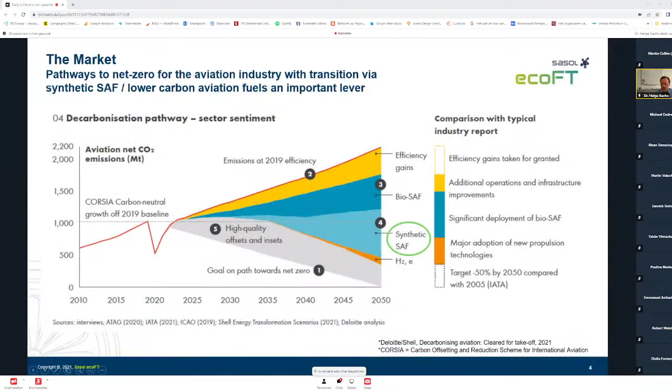So having said that, that was actually the market opportunity or the potential to decarbonize. The industry has consumed, the aviation sector, around 300 million tons of jet fuel prior to COVID in 2019, and the market forecast is that there will be volumes of 400 to 500 million tons of jet fuel consumed in 2050, according to all the market forecasts of the major OEMs.

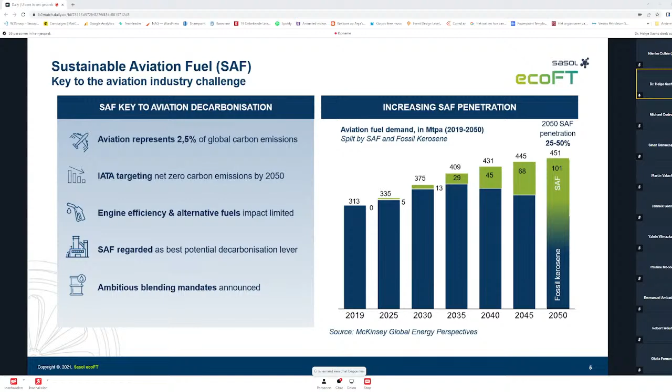There are different approaches in the EU, gearing up to produce more SAF with blending mandates or tax incentive schemes. So in the EU there's rather a stick approach, where you have to pay carbon taxes and are sanctioned as an airline if you don't comply with blending mandates, whereas in the United States there's rather a carrot approach, incentivizing industry with tax harbors to produce sustainable aviation fuels.

The European Union has extensive blending mandates already in place, up to two-thirds with RefuelEU. We also anticipate the EU will react to the recently announced IRA, the Inflation Reduction Act, which allows, for example, $180 per ton of CO2 captured via direct air capture, or up to $1.75 per gallon of e-fuels and clean fuels.

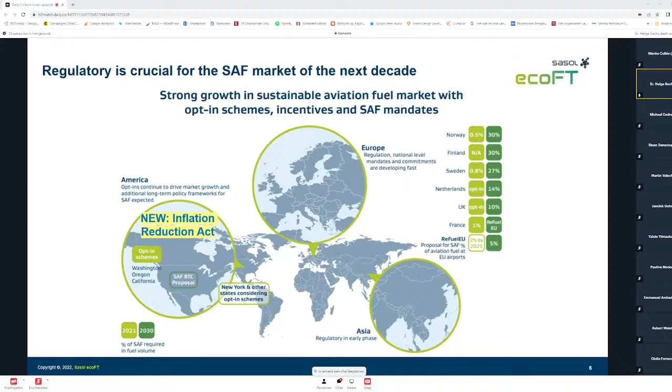Having said that, there's scarcity of green fuels, of clean fuels. The so-called HEFA pathway is the one that, if you're trying to source SAF as an airline today, you would rather use, as it's the only one industrially available at larger volumes already, with increasing volumes, since producers have prepared themselves to produce SAF via HEFA. The only obstacle the industry foresees is that HEFA feedstocks are rather limited. Forecasts say up to 20 million tons of SAF could be produced by 2050 using the HEFA pathway, with different feedstocks leveraged.

Soy and even other feedstocks could be used, with palm oil versus food being a concern. That's why it's really important that these fuels ideally leverage feedstocks that are truly sustainable, producing via other pathways in the United States from solid waste, MSW, which is an important one.

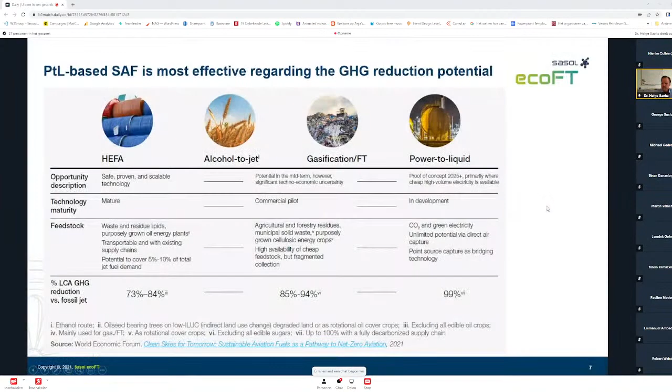Having said that, the Fischer-Tropsch technology is very much now coming into play. It's well positioned to help produce SAF because it's agnostic to both the hydrogen and carbon source. As mentioned before, Sasol, for example, can use it agnostically, either using coal, gas, or industrial CO2.

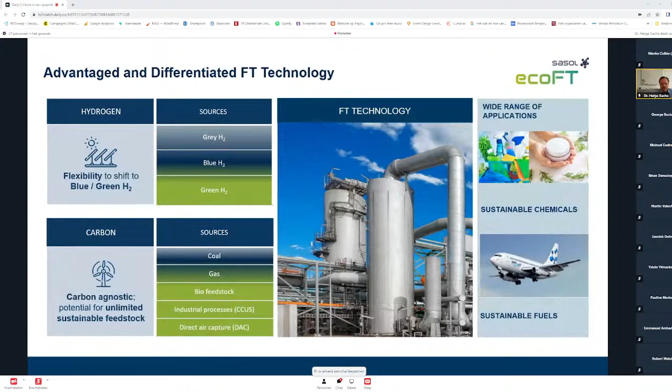The ultimate pathway would then really be direct air capture. So in a nutshell, the different pathways using Fischer-Tropsch can be seen here: either using biomass from forestry or agricultural residues or municipal solid waste can be leveraged.

These are then gasified in a gasifier to produce the carbon monoxide molecule, or we can use direct air capture. Companies like Carbon Engineering or 1PointFive and Oxy in the United States are gearing up to successfully build the first large industrial scale plant in Texas, which will capture and sequester around 1 million tons of CO2 per year, which is certainly an important lever.

However, with direct air capture in current scenarios, at large scale there's potential to build around 173 plants in the best case scenario by 2050, because each plant has a capex requirement of around $1 billion. That's a major capex impediment to bringing direct air capture to scale, because the carbon molecule in the ambient air only has around 400 parts per million. So 400 ppm is certainly the major impediment to using direct air capture at scale.

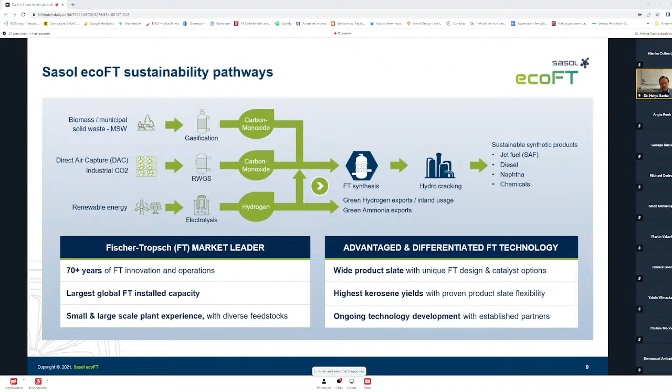And then there's the additional capacities in these countries. Just like, for example, I was in Montreal two weeks ago — the province of Quebec already has 40 gigawatts of renewable electricity as installed base capacity. So that's also a very important lever, leveraging that renewable electricity.

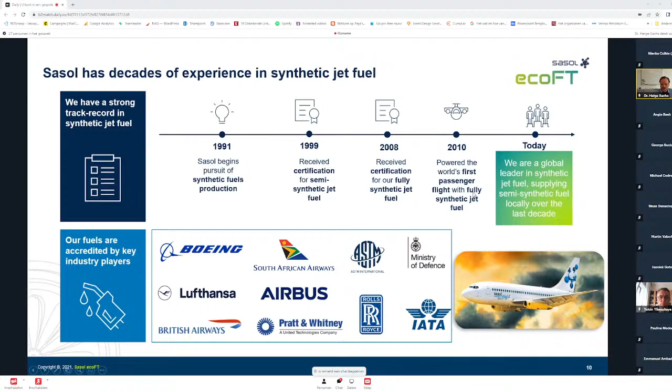Looking at Sasol, we have a long-standing, more than 30-year history in producing synthetic fuels from either coal or gas as feedstocks, and we achieved that over the years with multiple... a blend of synthetic paraffinic kerosene. This can also be used, because it's aromatics-free, as a proxy fuel for PTL sustainable aviation fuel. So we have this long-standing history in South Africa with Sasol.

If it comes to the question, when will this be real? Refer to one of the plants we are currently commissioning. Here, for example, in Uzbekistan, I had the chance to visit that plant four weeks ago. It's based in the south of Uzbekistan near Karshi. Very impressive, because it's a model plant that exists at that scale, and the layout of the plant is certainly unique in the whole world. That's a GTL plant, a gas-to-liquids plant.

There are a couple of projects that we're currently launching in the European Union. One of them is using biomass as feedstock, together with a partner, the company Uniper. Another project is in Germany, using a cement plant with the international cement producer Cemex. Another project we've announced is in the city of Hamburg, together with Siemens Energy, Uniper, and Airbus. Airbus is also apparently using the SAF for delivery flights, for ferry flights. So that's also a quite interesting landmark project and asset.

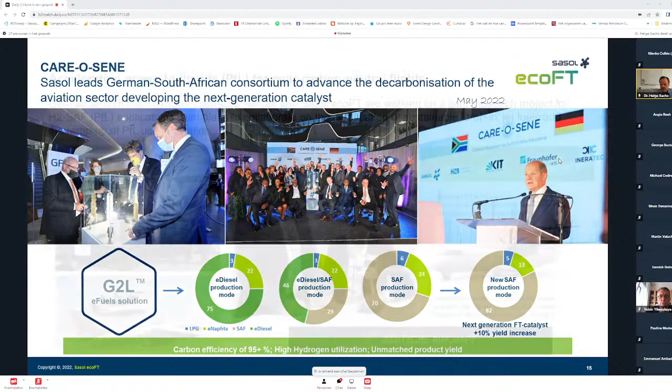What is really important is to use a catalyst that enables us to increase the yield of sustainable aviation fuels to up to 82%, which will be the industry benchmark with our latest next-generation catalyst development, because it's apparently a green premium product. The German Chancellor most recently started a project with us at our headquarters in Sasolburg, near Johannesburg, and we are currently developing a consortium of multiple research institutes like Fraunhofer, KIT, and Helmholtz for the development of this next-generation catalyst. We're also working together with OEMs like Deutsche Aircraft, but also Boeing and Airbus, to certify this PTL sustainable aviation fuel. That's a journey where we are currently leveraging, as a proxy fuel, the GTL-derived Fischer-Tropsch synthetic paraffinic kerosene. So that's Sasol in a nutshell, and I'm happy to answer your questions.

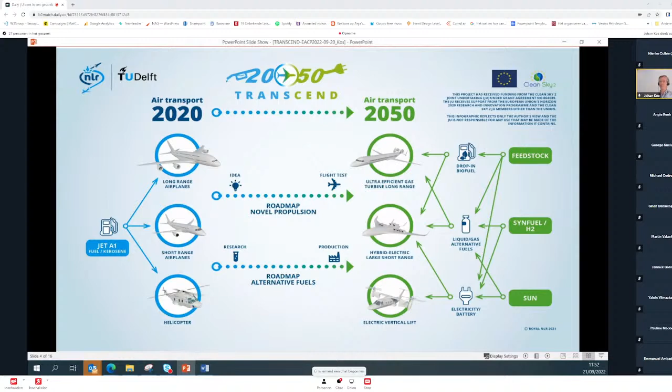I don't have to explain much on this slide, because it was already nicely, very well, and in much more detail introduced in the previous presentation. But to say that here in Transcend, we focused on sustainable aviation fuels, both the bio and waste-based one, and the synthetic one. We also considered hydrogen as a fuel, and I think it's useful to note that when we're talking about hydrogen, we're referring to green hydrogen, but this is also a feedstock to produce synthetic SAF.

Then in terms of emissions, we will talk about gross emissions and net emissions. Gross emissions are the emissions that come from the tailpipe of the aircraft. Net emissions take into account that the carbon used was coming from sustainable biomass, recycled carbon, or carbon coming from air.

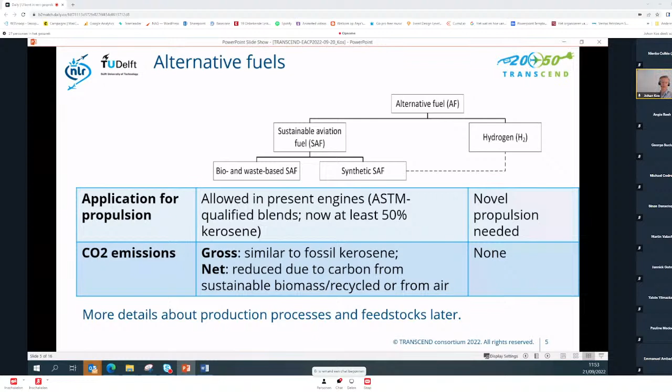In terms of technology, we'll focus a bit more on propulsion technology and aircraft technology. Clearly with sustainable aviation fuels, they can already be used in blends. But for hydrogen, it's not possible to do that with present propulsion, and really novel propulsion is absolutely needed. There are also very good reasons to have propulsion improvements even in combination with SAF.

So we looked at a number of propulsion concepts, went into detailed literature study to see the opportunities there. This is just a very short summary of the 7 propulsion concepts that we went into in much more detail. We can look at the usual combustion type of engines based on gas turbines in combination with SAF. We look at hydrogen-based combustion, and other hydrogen variants, namely in combination with electric fuel cells, or hybrid hydrogen. Those are the ones we will focus on. There are, of course, a few other alternatives mentioned here, but we will not go into that detail.

In terms of application with hydrogen and electric flight, it's typically for somewhat smaller aircraft, but you can even go up to twin aisle configurations for short distances.

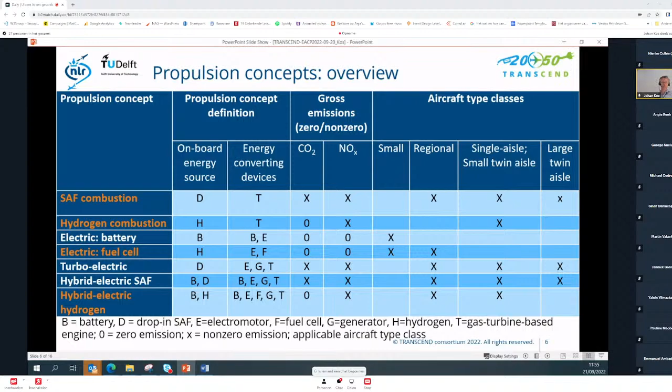So then we started, we wanted to evaluate the impact on the fleet level on the transport fleet. So we start with this propulsion technology and evaluate what their gross emissions are at the aircraft level.

So we did that in 2 ways. One is we take aircraft concepts with novel propulsion as being modeled and investigated by the Clean Sky, European Clean Sky 2 program. In this program, it's all about propulsion based on fossil kerosene. Here we will look at the use of sustainable aviation fuels, but of course it does not change very much in the gross emissions.

And the advantage of the Clean Sky 2 aircraft is that they are much more energy efficient than present aircraft, and so that is an advantage in terms of reducing the impact on the environment.

Then as a second type of aircraft, we looked at hydrogen-powered aircraft. We took a number of these Clean Sky 2 aircraft concepts and rebuilt them into hydrogen-powered aircraft. We modeled that type of aircraft and checked the modeling and assumptions with a group of experts from industrial partners, academics, and research organizations, and we evaluated that with our MASS tool, which is used for evaluation of powertrains in the context of an aircraft.

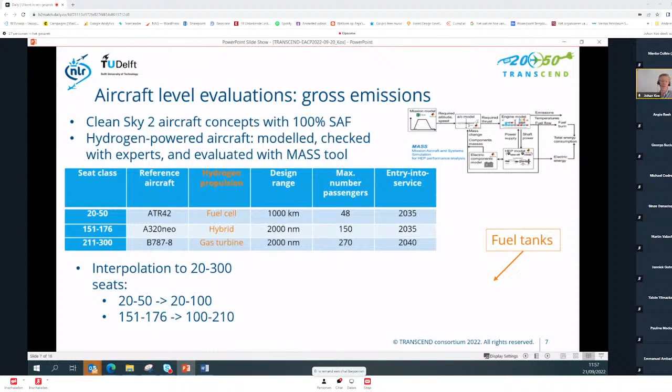This has been done for 3 types of aircraft representing the seat classes you can see there: an ATR-42, an A320neo, and a Boeing 787-8, with different types of hydrogen propulsion technology - fuel cell for the smallest, pure hydrogen combustion for the largest, and a hybrid configuration combining the fuel cell and the gas turbine for the middle one.

And then we do that for shorter design ranges than usual, with the normal number of passengers, and with entry into service in 2035 for the first 2 and 2040 for the last one.

Here you see an example of an artist impression of the SMR, the variant for the 151 to 176 seat class. What you can see is the fuel tanks are modeled to be in the back, and as a consequence the center of gravity shifts backwards, which has been modeled by moving the wings further back. Of course, it also has to be taken into account to what extent these wings have to be changed.

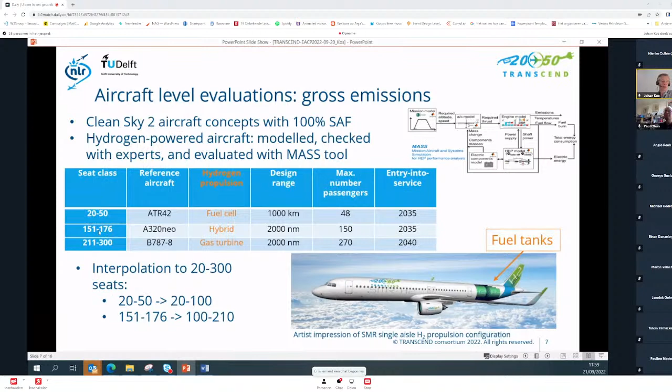So we applied these results to the whole seat classes from 20 to 300 seats by using some interpolation.

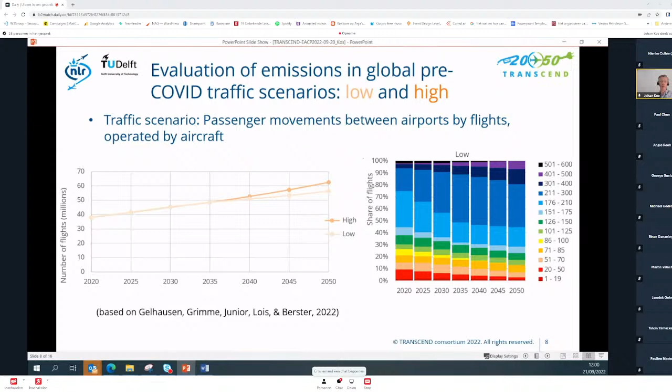Then on the fleet level, what we see is comparing two scenarios. One is with the Clean Sky 2 aircraft, so with technology improvements and SAF at 100%, no blending, or introducing in this scenario also a hydrogen aircraft for the 20 to 300 seats with short ranges. And we see globally, if we introduce that, a gross emissions reduction in 2050 which is 20% more due to the use of hydrogen aircraft.

And with only a slight increase of gross energy consumption, and of course, introducing hydrogen aircraft, there will be more emission of water.

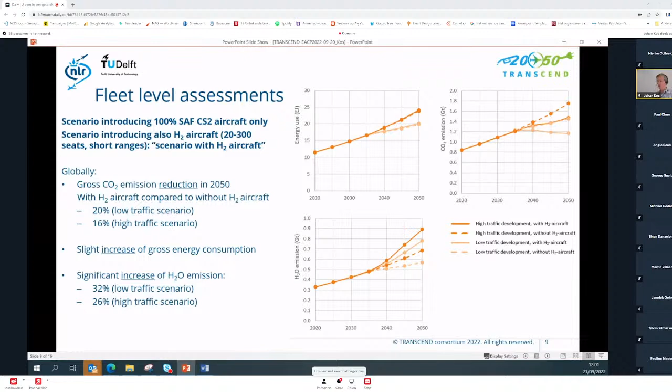So then we look to the alternative fuels for the roadmap, and in that sense we look to availability, and we also look to economic aspects.

I will talk a bit more about availability now, and we restricted to a scenario of only flights departing EU plus UK. We looked at the availability, and we also used green hydrogen as first priority for the hydrogen-powered aircraft, and the remainder as feedstock for the synthetic SAF.

And we also took into account that this feedstock will be used for aviation fuels, but also for other fuels or even other non-energy use of green hydrogen.

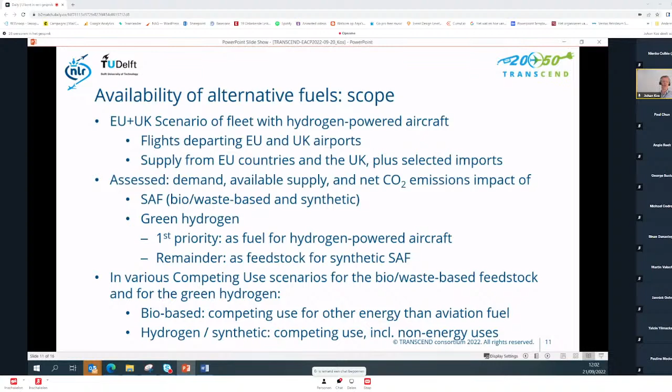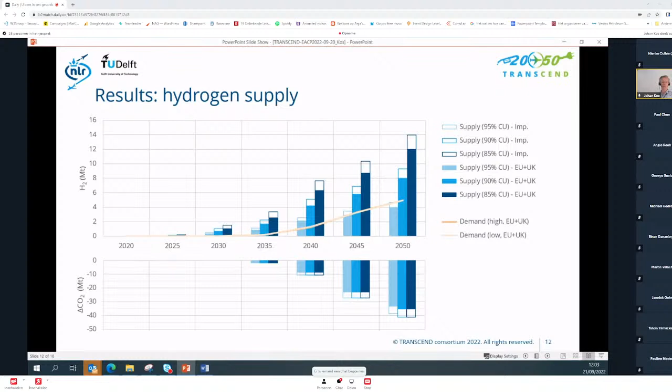And then we see in terms of the hydrogen supply, that's all quite fine until 2050, even with 95% use for non-aviation purposes, and some slight import from neighboring countries, contributing to a reduction of 40 megatons of CO2. If we look to the SAF, it's a bit different. We see that the bio-based is increasing, but hardly.

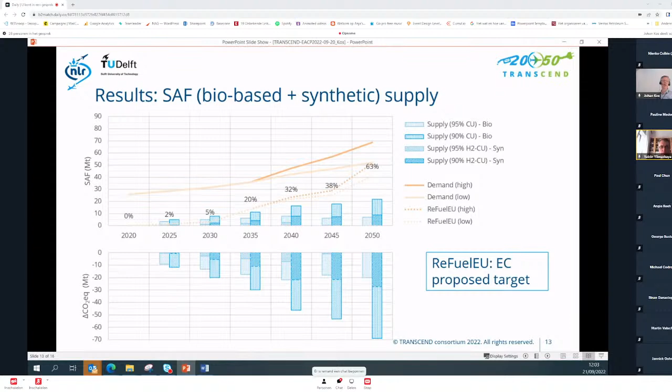Of supply, and specifically hydrogen-powered propulsion. But for the SAF, we see that the proposed targets can be met up to 2030, still provided there are sufficient production facilities. Of course, but the prognosis for production facilities is typically not for such a long period.

And with the growing gap after 2030, there is a potential of a reduction up to 40% for net CO2 equivalent emissions, greenhouse gas emissions until 2050, based on a technology-driven demand in a hydrogen-powered aircraft scenario, comparing that with fossil kerosene.

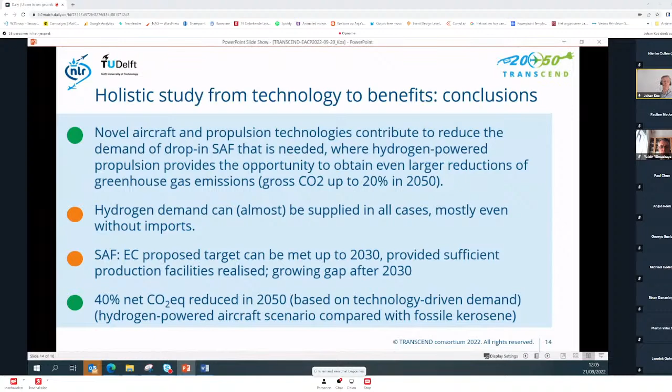We have some additional results available, which will appear probably next week, on the economic viability of the fuel and the energy needed for fuel production, comparing the hydrogen-powered aircraft with non-hydrogen. We see typically that the cost of hydrogen is expected to be lower, and the energy needed is also lower. So another advantage of moving towards the introduction of hydrogen-powered aircraft.

And we will publish a number of strategic recommendations to pave the way towards 2050. Thank you.

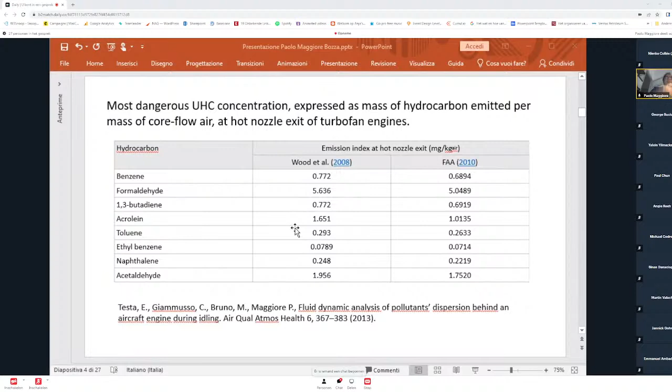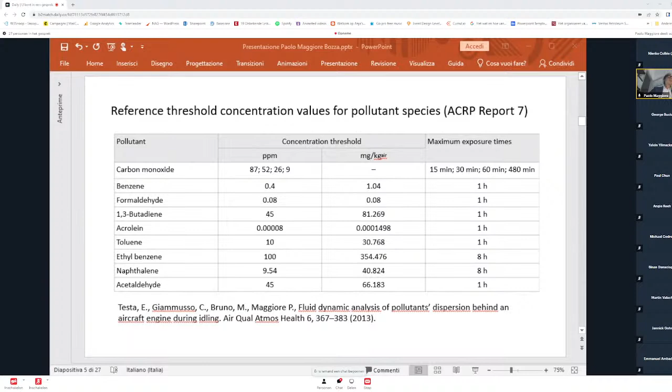Another figure from authoritative sources shows levels of exposure of the population depending on the concentration of pollutants.

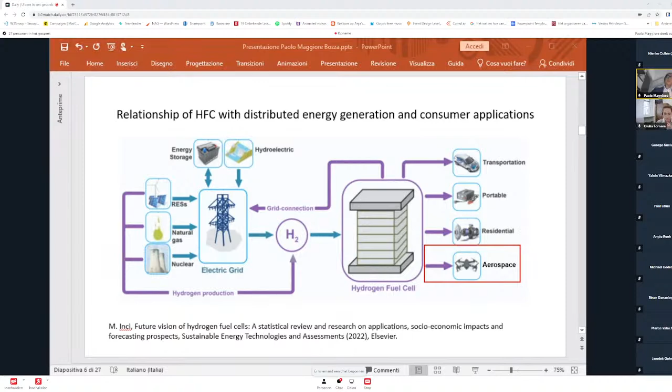The focus of my presentation addresses aerospace application, but I will connect it to transportation, speaking of small fleets of small vehicles. In this big picture, you can notice the suitable applications of hydrogen fuel cells for aerospace and transportation.

We are already on track for small vehicles that are not managed in fleet style. We also have general aviation aircraft and UAV drone fleets, which are the right size for a suitable application of hydrogen and fuel cells.

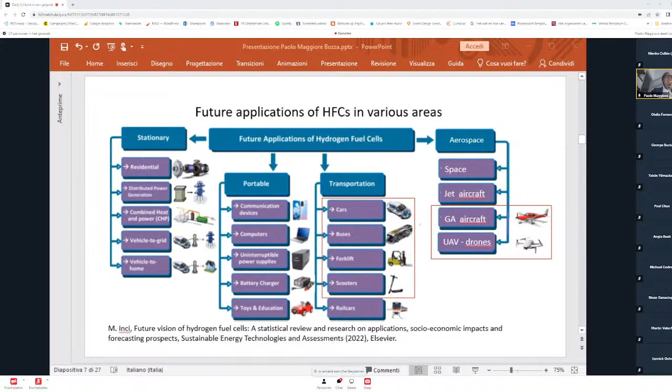As shown in the figure, grid balancing has become even more significant in recent years with huge cities and integrated activities, including renewable energy sources such as photovoltaic, hydroelectric generation, and integration with national grid networks.

For this reason, storing excess energy as hydrogen offers an important option. We can store gaseous hydrogen indefinitely, helping the management of electrical grids and preventing energy losses, as is useful in electricity grid management. So hydrogen would also be useful for power grid management.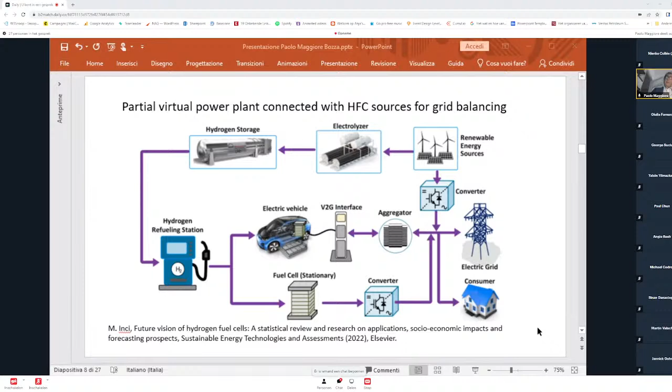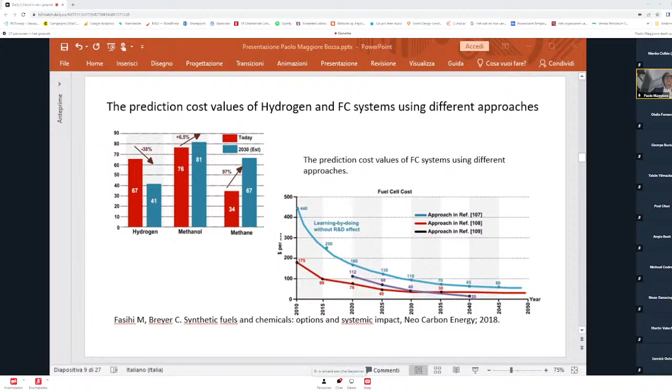What about storage? Speaking of onboard storage, not production or distribution stations on ground, the best solution is physical storage via compressed tanks and liquid cryogenic tanks, as the previous panelist mentioned. Even though these forms offer opportunities, they also have drawbacks in terms of logistic management, boil-off, and safety issues.

We also have chemical storage of hydrogen. This would be useful for small aircraft, in particular for drones and unmanned vehicles.

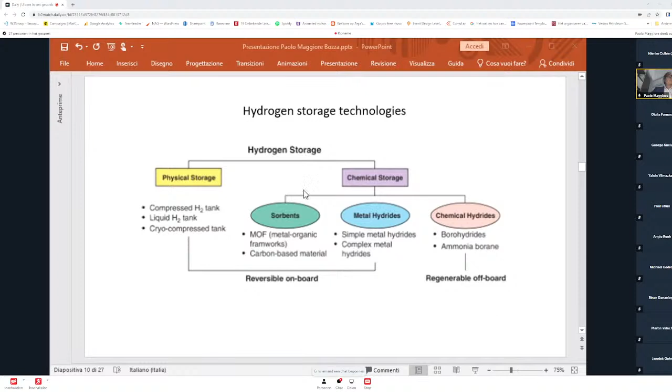We have different technologies, but it's not interesting to go inside these technicalities. In this table, a comparison of hydrogen storage methods is shown, and generally for commercial aviation, meaning large and medium aircraft, and for more general large applications, cryogenic tanks that can store liquid hydrogen continue to remain the most attractive storage method, speaking about hydrogen. It provides high hydrogen content for low weight and low volume capacities.

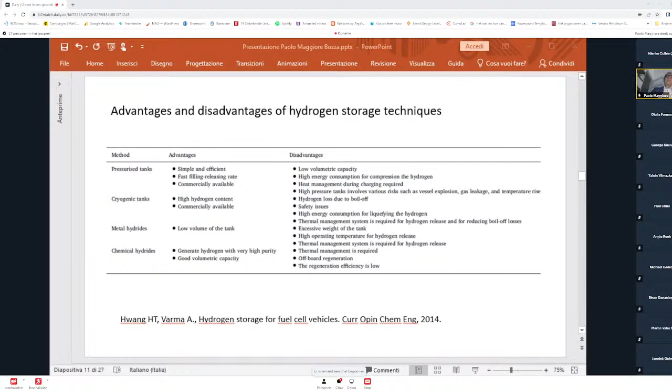This means it's useful for large energy storage. Hydride and gaseous storage methods are impractical due to the excessive weight and volume of the tanks, apart from small aircraft, where the total amount of energy is relatively low. Aircraft and small ground vehicles that would be integrated in certain types of operations.

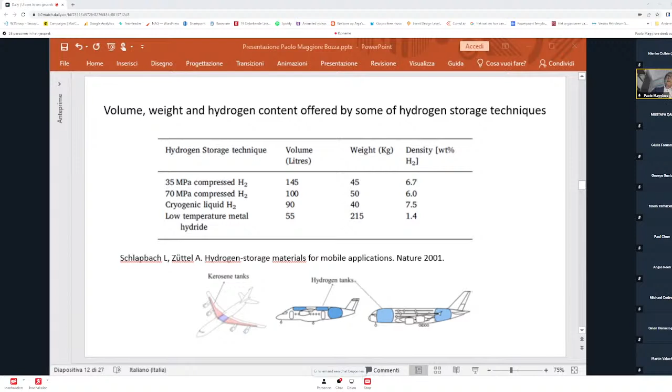Another important issue, as has been discussed by the previous panelists, the figures show hydrogen production growth for the following decades and the share of hydrogen fuels by sector by 2050. According to this IEA report, it's obvious that the majority of hydrogen production is released with low carbon technologies, and we consider that for commercial aviation, the solution is synthetic fuel.

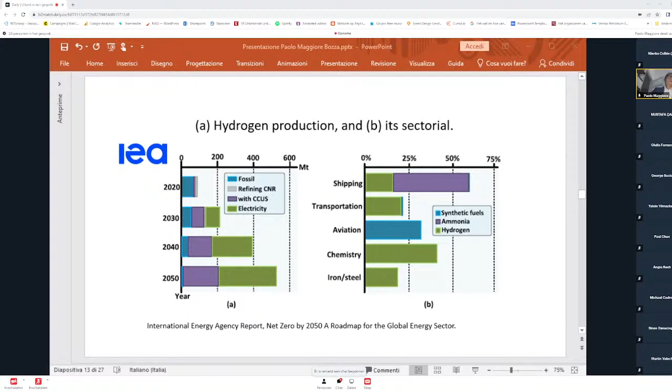Coming back to small aircraft and in particular UAV drones applications, you can consider that proton exchange membrane fuel cell technology is the most suitable for several aspects, in particular the temperatures and the ease of transient management during thrust level changes in piloting.

You also consider the storage type of hydrogen on board and the endurance. That means if you increase the endurance and the mass of the aircraft, you can shift from the battery to the fuel cell application, in terms of weight saving opportunities.

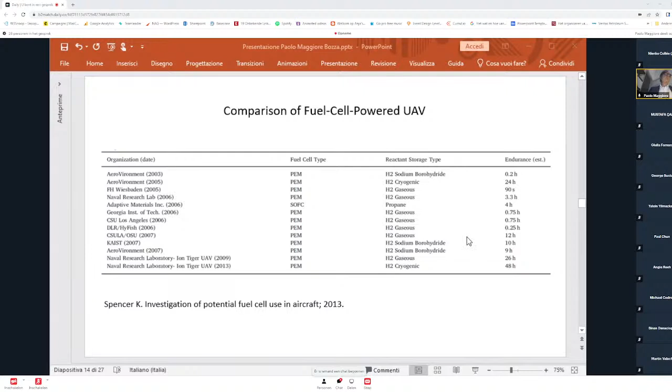Okay, this is the scenario in which I will now describe a brief review of research activities performed at Politecnico di Torino. In particular, we started in 2005 testing fuel cell behavior at high altitude, to consider the effect of humidity, pressure, and temperature on fuel cell performance.

Then we moved on to testing on board, and in 2007 we produced this APU, auxiliary power unit, for general aviation aircraft, in particular for ultralight aircraft. Tests were performed, and we supplied energy for some systems on board using compressed hydrogen. This was a compressed gas bottle at 20 megapascals with polymer membrane exchange fuel cells.

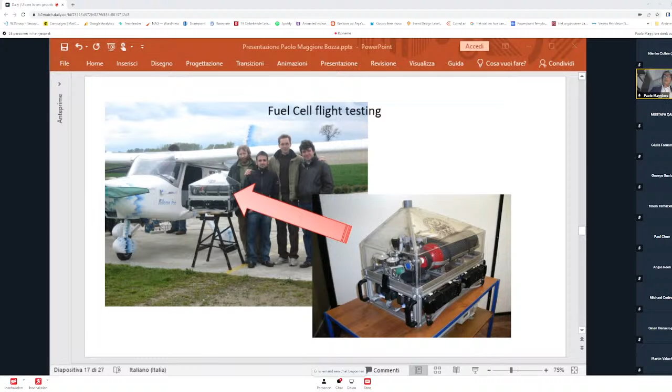Then we moved to the propulsion of a large model glider. This test was performed in 2008, still using compressed gas in a metal hydride bottle and fuel cells with PEM technology.

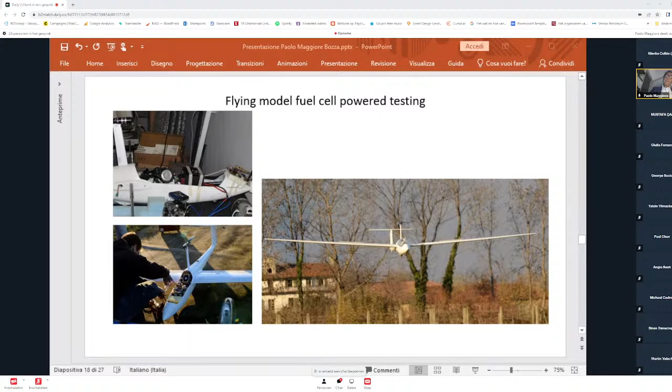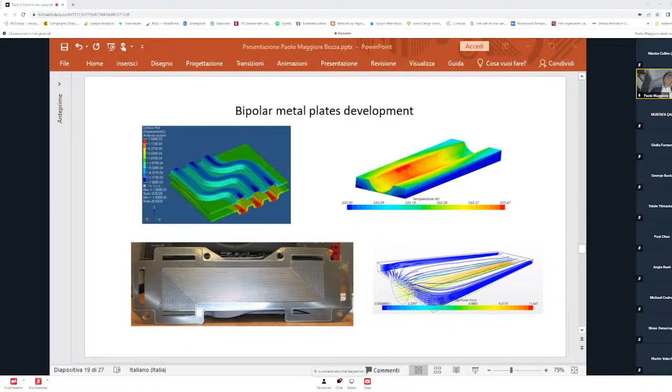Then we moved to research on opportunities to increase the performance of fuel cells. In particular, we performed studies to replace the traditional graphite plates with stainless steel equivalents, and we developed some prototypes of these metal plates.

Then we launched an interesting program, the SkySpark program. In 2009, on the occasion of the World Air Games in Turin, we flew this aircraft. It is an ultralight aircraft that we modified with the help of the producer. You can see the general arrangement of the tank and the fuel cell stacks.

This was an integration on board of a traditional aircraft, and this required a lot of changes that were a bit costly and complicated.

We tested the electrical propulsion without the fuel cell stacks on June 9th, 2009. This was the maiden flight in Turin to test the electrical power line with batteries, and we tested hydrogen propulsion on ground. Then we stopped the program as the cost for the university team wasn't bearable.

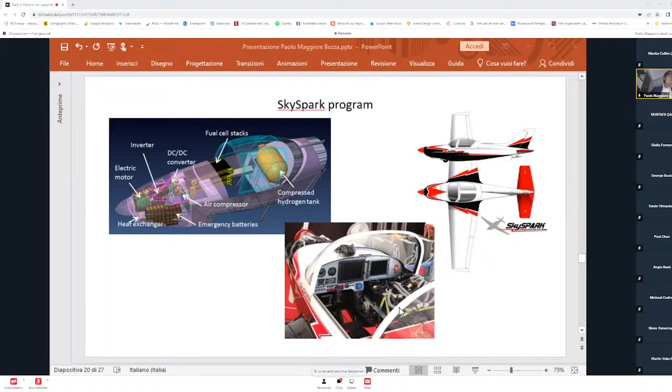From this heritage, we moved to ongoing research activities that are still on track. We cooperate on these activities with some companies. I have put these logos on this slide, and I give some suggestions to small and medium enterprises to increase their

capacities to supply hydrogen technology for this type of application: small vehicles and small aircraft, interconnecting on grid near airports, near cities, near flight clubs.

The first program is the hydrogen production, storage, and distribution station. On this project, we are conceiving the integration of an aircraft fleet with a ground vehicle fleet for logistic distribution, just to design the requirements in terms of hydrogen production and storage, and to increase the use and usage profile of hydrogen, reducing the storage on ground for servicing these fleets.

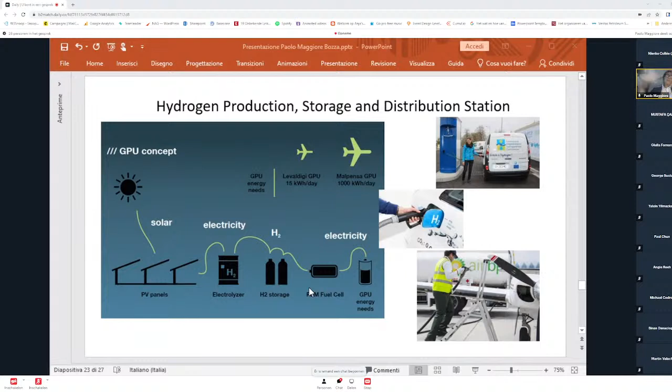Another interesting activity we're developing now is components like the electrical recirculating pump that solves problems related to nitrogen pollution of the fuel cell stack. We're developing this recirculating pump using regenerative technology, which gives us advantages in terms of reduction of weight and power for recirculation of the unused hydrogen on board the fuel cells.

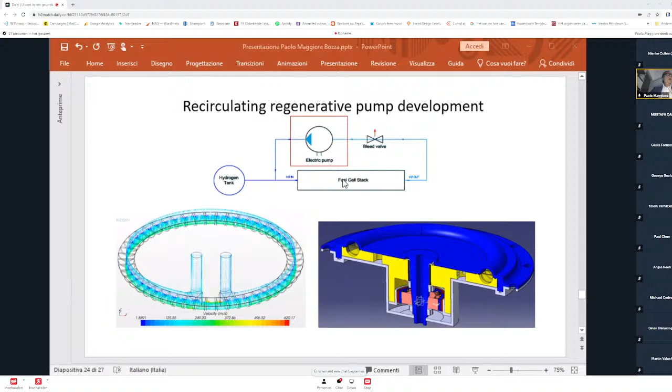Now we have another interesting set of activities: onboard hydrogen regulation and monitoring. This means addressing safety issues while reducing the weight and complexity of the system on board. We're working on hydrogen flow regulating valves with Collins Aerospace Microtecnica, and an in-tank one-step pressure regulator that reduces the pressure level to what's needed for proper fuel cell operation.

Another interesting subject is hydrogen quick disconnect filling valves by Jointech. This is a joint program we're developing with the Jointech company.

This is research from Politecnico di Torino and PhotoNext laboratories using a specific technology, optical FBG sensors, to measure pressure, temperature, and humidity inside the tank. Using the same optical fiber technology, we implement functions for diagnosis and prognosis of the tank structure and for detecting hydrogen leakage, to prevent safety issues during operations.

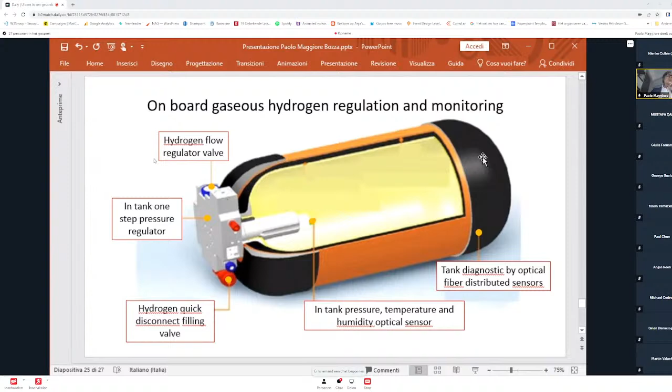So these are some examples of technologies being developed to increase, from the aircraft point of view, the integration of proper fleets of small aircraft into the hydrogen economy for transportation. This will be a useful example for small and medium enterprises, and even large companies, to cooperate with Politecnico di Torino or other universities on this subject. This is another opportunity.

We are going outside aviation now, moving to moon exploration. We are performing studies to support astronauts and, more easily, automated vehicle operations on the ground of the moon, using fuel cell technology applied in a regenerative and renewable vision, where solar power allows us to electrolyze a small amount of water to produce the byproducts oxygen and hydrogen, and to produce electrical energy inside the fuel cells to supply these operations. Fuel cells are a good alternative to the more aggressive use of radionuclides and nuclear power stations foreseen for supporting these complex operations.

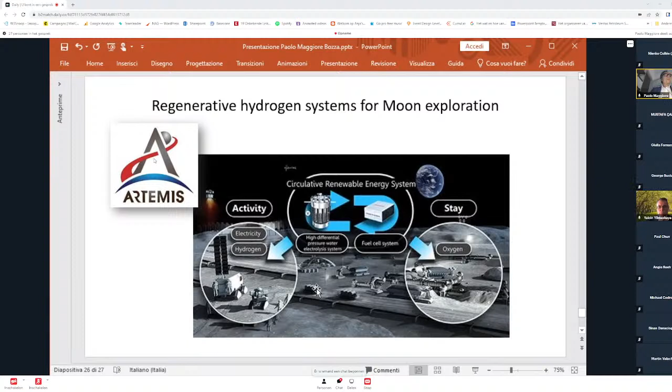So that's all. Thank you for listening to me, and I'm available for questions and whatever.

Professor Maggiore, thank you ever so much. Very interesting. I don't know if we are going to see if there is something going on on the moon. With my age, I don't think I can, but I wish everything will go well. So thank you ever so much for the presentation.

You're welcome. I looked at the chat, I don't see any questions, but I have one question for the remaining panelists, Mr. Sachs, Dr. Sachs, and Professor. There's a lot going on the academia side, and there's also a lot of need on the industry side. So my question goes to Dr. Sachs and my good Professor Maggiore: what should be the strategy to make sure that these two entities, academia and industry, work together for reaching the carbon neutral aviation goals in the next 10, 20 years? Maybe the professor would like to take the first shot, then I'll give the floor to Mr. Sachs. I'm sorry, who is first? You are first, sir. Oh, okay, thank you, okay.